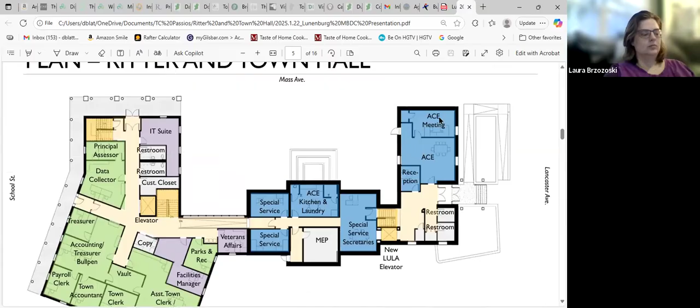I think either could work as long as the proximity was close. My ideal would be to do a complete renovation of Turkey Hill and keep us here. But there are facility limitations -- there's only one adult bathroom in the building. That becomes a limitation for us being located here.

So that would be my dream. But we could also have our own space that was close. The Ritter plan was great, but the town clearly, from what I understand, did not choose that option because of the size of the ACE program.

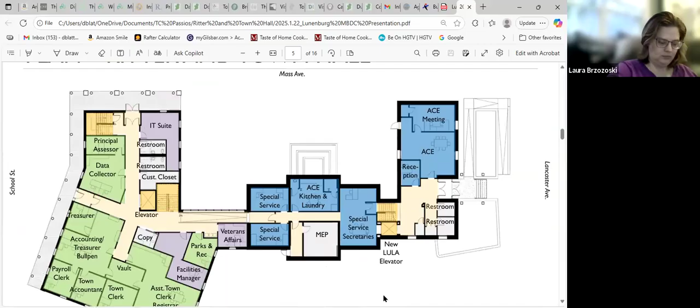Yeah, and I just thought, to help those folks for whom it wasn't fresh in their mind, this was the plan that we had proposed, that you can see on your screen. This would be the upper level -- what you see today would be where HR finance would have been, where the building inspector is, superintendent is, where the building inspector, admin would be, director of teaching and food facilities would be, conservation and board of health, if you're familiar with Ritter today.

And then the other level, the lower level, which is right now the planning department and planning meeting room, would be for ACE. And then there would be the ACE kitchen downstairs. And what's right now the veteran services and the facilities director's office would be other special services rooms. So as you can see, for the footprint, a substantial amount of space was dedicated to the ACE program out of all the room dedicated to the school.

Understood. And that's why the biggest dilemma we have is whether ACE stays on the administration side, or whether ACE was a separate entity, because some folks talked about whether it was appropriate to have ACE in the town hall, as if we looked at it as town hall, town business type of thing. Yes. Okay, all right, excellent.

Jody, and maybe anybody else with knowledge on this, just dovetailing on your preference or best case scenario comment where we'd renovate Turkey Hill, full renovation, and have the offices in there.

Pardon my ignorance, I should probably know this, but do we have enough room in that building today? If we were given a grant and money wasn't an object and we could renovate, do we have the space for central office and what we need it for programmatically for the students?

I believe that we do. We were able to find an art space, which was one of the concerns with our move over here. So we have a dedicated art room, a dedicated music room, and a dedicated STEM room. We have the library. We have just enough room for the number of kids we have today. So if we have a lot of expansion or move-ins, we definitely need more plumbing and facilities.

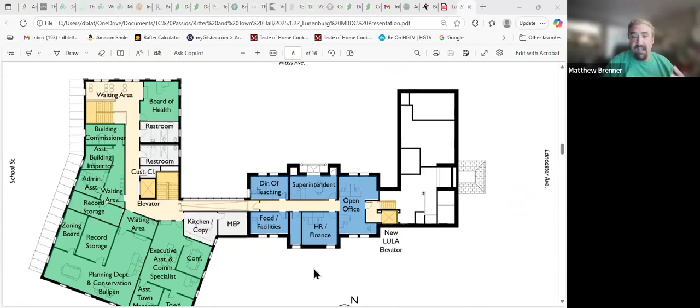I 100% hear the desire to redo Turkey Hill and keep central offices there. I get that, and understand why that would be our first choice going forward. But I want to make sure I understand all of our options. Jody, I thought I heard you speak positively of the previous design that went before voters in May and was turned down—correct me if I'm wrong. When I looked at those plans, all of the needs for central office and the ACE program are met in the current footprint of Ritter as it exists now. I would never encourage Ritter remaining as is without substantial renovation, because that building needs it desperately. But do I understand that correctly? And if so, would it also be acceptable to consider moving central offices to Ritter, or is that a non-starter for you?

It's not a non-starter. It wouldn't be my preference, but it's not a non-starter. Oh, thank you. I used to be a teacher—I get why you want to be with the schools, and I think that's likely the much better choice for us. I just saw that lineup so sweetly, and I wanted to make sure I have this in my back pocket too. Thank you.

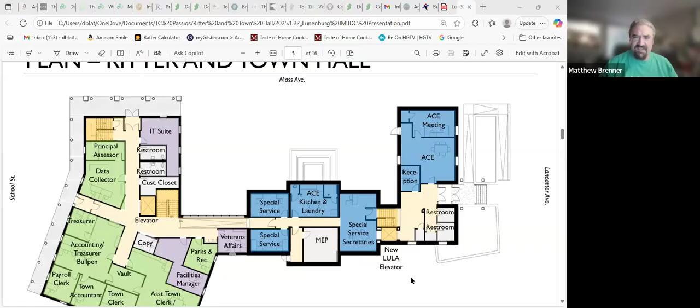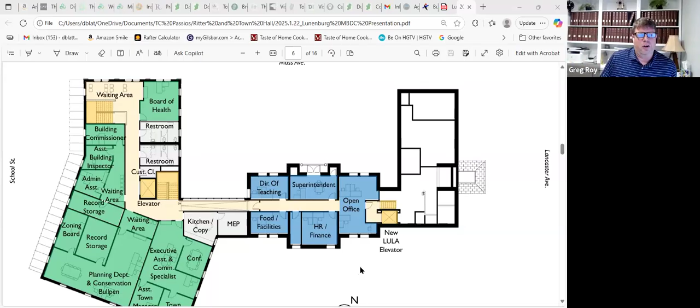Where we're on this screen showing the superintendent's office - I get that's a merging of a couple different spaces we have cordoned off today in the Ritter building, but that's a pretty narrow spot. My point is, I think we were intending on doing a major renovation here, but I'm not certain the space is really going to work as well as it could in a place like Turkey Hill, assuming you're going to have a comparable renovation. I haven't seen the exact space they're using, but I'm guessing it's more along the lines of a classroom type space, so you have bigger spaces that can be renovated perhaps a little more easily. But it's just me.

Greg, I do want to clarify, for everyone - that isn't the position I expect to advocate going forward, but I get it, Matt. Yeah, sorry, I wasn't trying to pigeonhole you. No worries.

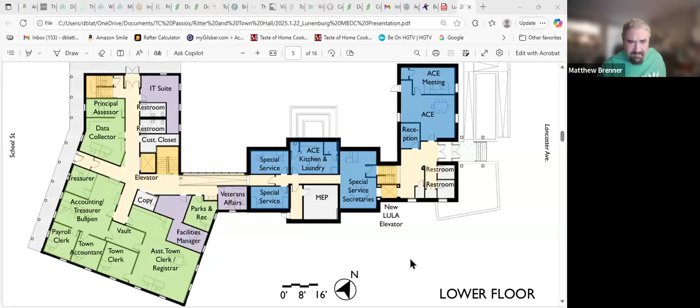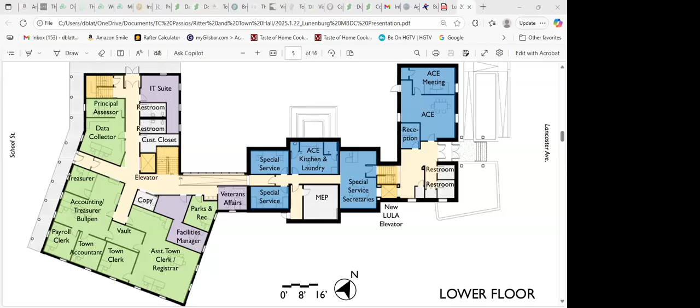So I just have a question. I know we're all pretty excited about the fact that we can separate the two, the school and the town - sorry, Jody, it feels weird saying that. Jody said she wanted to talk to her offices and make sure they were okay with that. So I want to make sure we don't skip that point and that we have somewhat of a timeframe of when she'd come back to us, being like yeah we want to stay, or no, please keep us in the plans. And I know Dave wants to move on from this topic, but just really quickly...

I think it's also important to note that we're going to pay for this, unless I'm missing a program here, 100% out of pocket. So I hope there shouldn't be any notion that if we put this renovation of the central offices and combine it with a larger school MSBA-type project, MSBA will pull that work out and not match us for it. Almost certainly we are not going to cost share on any of this work. So it may make sense to put it there logistically, cost-wise, but we're probably not likely to participate in any sort of MSBA, or whatever they call it now, state sharing in a school project.

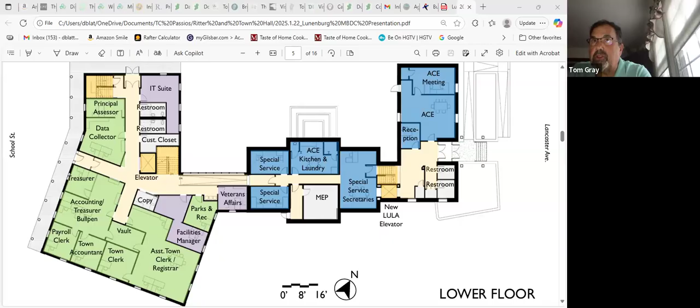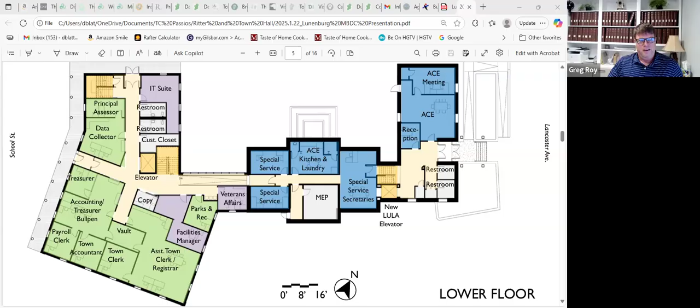Would that be for the ACE program or for central offices, or just? I'm not certain about ACE, but for example, when I was on the committee for the Lunenburg Middle High School project, there were so many things they did not participate in - the most obvious is the greenhouse program. It's a direct school program, the state didn't fund it at all. We paid 100% cost for the greenhouse, and I would imagine central offices would be similar because it's not a direct program to the actual programmed use of the school. I could be wrong, but that was my experience in the middle high school project. But we would have paid 100% if we would have had them in Ritter too.

Absolutely, I'm not saying it's going to be more expensive, I'm just saying we shouldn't think there's any opportunity for less - perhaps there is, but I would imagine the state's going to carve that out. Town participation is the same either way. Not doing central offices in this project does not necessarily save us money, it just makes - there's still that problem to be solved. So that's just important to keep in mind, because I feel like, oh, now we can get a new town hall built for cheaper if we can get rid of this square footage, but the need is still going to be there and the town is still going to have to foot the bill. It'll just be easier for this piece of it, which - I don't know, maybe this town has a history of preferring projects in little pieces instead of a more cohesive plan. I'm thinking of 2004, the library and public safety and the primary school.

Agree. All right, just so we're all on the same page here - the prior superintendent, my recollection, was that she wanted to keep her offices out of the schools, and that's why. And then ACE had to follow, as we just talked about.

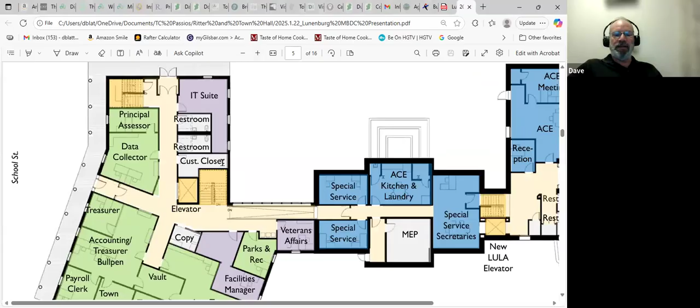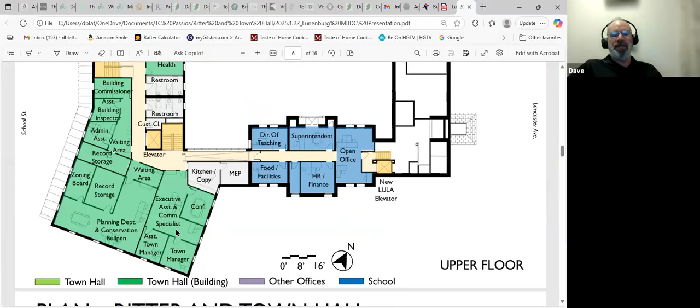This section on your left, my left as well, was the town hall offices. We had basically everything on the first floor. On the second floor, upper floor, was going to be town manager, planning department, conservation, building inspector, things of that sort. So the first floor was going to be more like accounting, town clerk, and things of that sort.

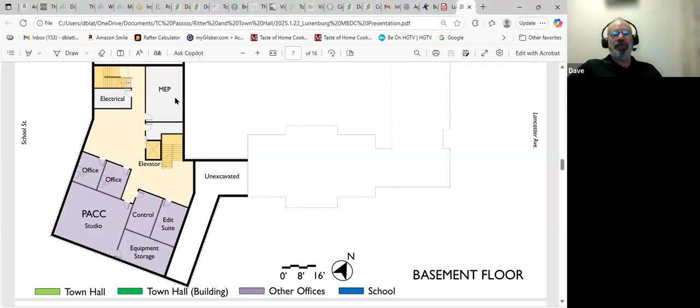I don't necessarily agree with all this, the way it might be set up, but I'm not going to ask that right now. The second floor was more for folks who want to go get a permit or other things, they would be going up to the second floor. And then the lower level created a space for PACC and a mechanical, MEP, I assume is mechanical room, for lack of a better term.

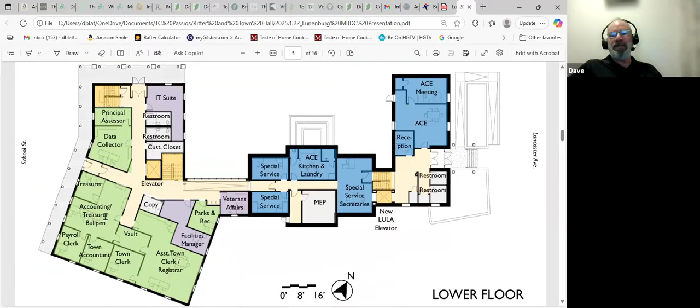So, obviously the footprint is quite different from what we want to do, or what we can do. I believe that this rendition of space was done based on what the department said as wants, I should say, versus what we might see as our needs for this renovation.

Can I ask a question of the people who've been on the committee? And I want to phrase it delicately, because don't phrase it delicately, we're all big boys here and girls. Why is having town hall all in one building a need and not a want? I understand the reasons why, and I agree they make sense, but what was it that pushed, what were the considerations that pushed one conjoined town hall from a want to a need?

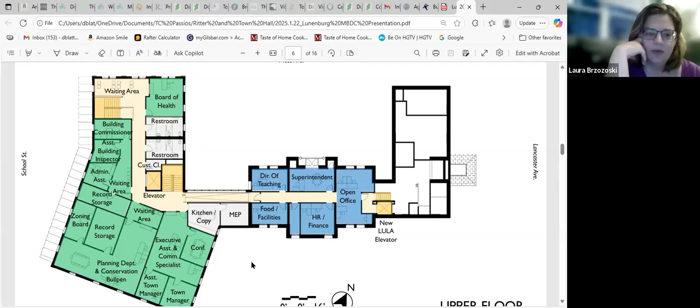So I'll throw it in at first. Greg, I'll let you join in as obvious. I get to be chair now, so I get to do this first. I can act like Mr. Jeffries. The fact of the matter is, I look at it as the interaction of the town. The town manager had two facilities they were having to go work through, or just a simple thing of if you wanted to go get a permit, or something to do with having to pay, you had to go to one building, get your paperwork, go to the other building, pay your money, go back to the first building to get your certificate or something like that. But it more had to do with it's a town, and that the town administration should be a unit that works together more than anything else. And especially now when we're looking at filling vacancies and things like that, how much of the electronics age, what is the dynamic of the town hall going to look like as we move forward, type of thing. Greg, how'd I do?

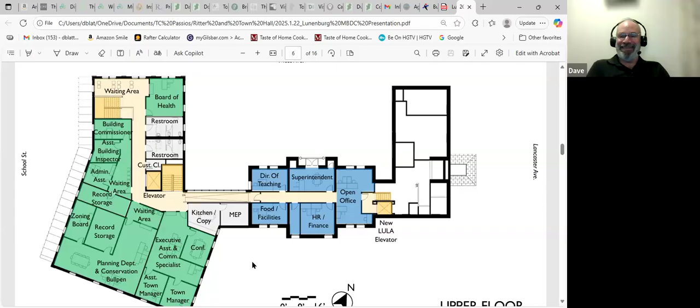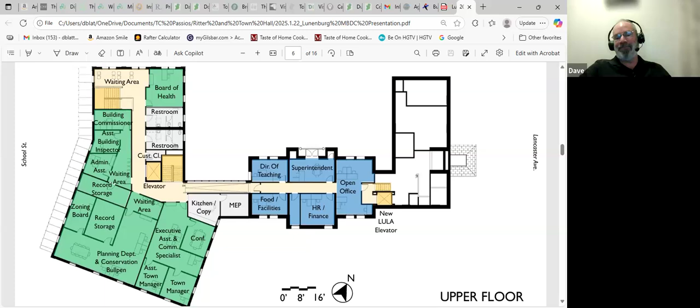Good, I have two things to say now that you've commented. My response to Laura's question was not necessarily to answer it, maybe to be a little bit more political. But this I think is in the spirit of what I said earlier. The reason why we were looking to consolidate town offices into one roof is because that was what the article said in 2019, when they funded the first study of this committee, and the select board chartered us.

Fast forward down the line now for 5 years, and we have definitely just carried that mission forward, perhaps without giving it enough follow-up scrutiny. I mean, one of the things that's happened in the last 5 years is, and I can tell you this from experience as a person in town who files land use applications, it is all done 100% online. You don't have to walk around anymore, you don't have to file plans, you don't have to even go get a certified abutters list from the assessor's office if you don't want to. They'll do it automatically for you through the OpenGov system.

So things are changing. I'm not saying that the consolidated office isn't a need, still it might be, but I think we talked about this a couple weeks ago. And I get that we don't have the town manager with us tonight, and that's fine, but we need to engage the town manager on this point. Yeah.

We need to understand what she thinks about this issue, because things in town are changing. Personnel has changed significantly over the 5 or 6 years since we started this process. The way we do business in town is changing. This discussion about questions and what we're going to ask departments, I really think we got to be careful to make sure we do it with the town manager, at least. I think she needs to have input on this.

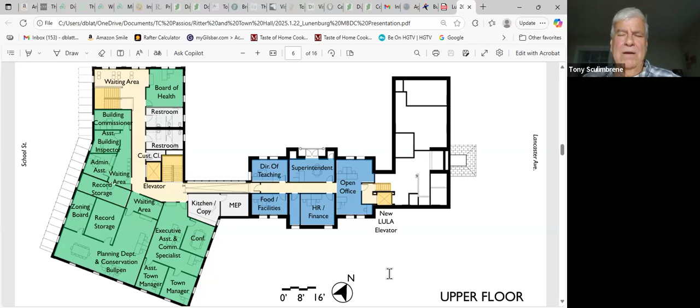I'm not saying we shouldn't talk about it, I'm just saying she might want to have some oversight. It's really important for us to talk about whether what pieces we need to be co-located, because you're absolutely correct. OpenGov started out being used by the building permit process, that was its first use, but now it covers everything.

And they're trying to expand it even more. Conservation, and you can pay for stuff, you don't have to go to the town clerk's office. It has really, and it's not going to get anything but more robust.

I think it's a sea change, and this is one of the things I've talked about as being part of the master plan process, is that the way town government functions is going to be much different 10 years from now because of AI. The Board of Assessors, assessor information, GIS stuff, paying your taxes, trying to deal with a tax bill you think is too high - it's all going to be done differently than it has for the last 50 years. It's going to change, it's going to be like night and day different in the next couple of years.

And I think it's absolutely something the town manager needs to get involved with. I think it's really crucial. I think we need less square footage for public town functions than we ever imagined. But we need to have a conversation with the town manager about that to make the transition.

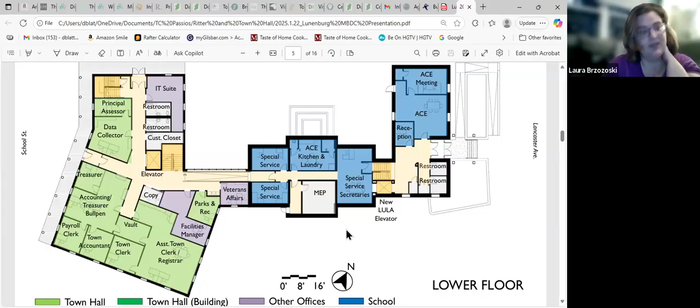But like Tony said, I think a lot of things have changed because this original committee started pre-COVID and pre-Zoom town meetings. That's exactly right, no kidding, I was just going to say that.

The whole COVID thing has changed the whole game too. When I want to meet with the building commissioner in Fitchburg, I don't go down there. I email him and say, can I set up a quick video conference with you? And he just pings me on a video meet. It's great, it's just as good as going in, it's better - I don't have to waste half an hour round trip, it's more productive.

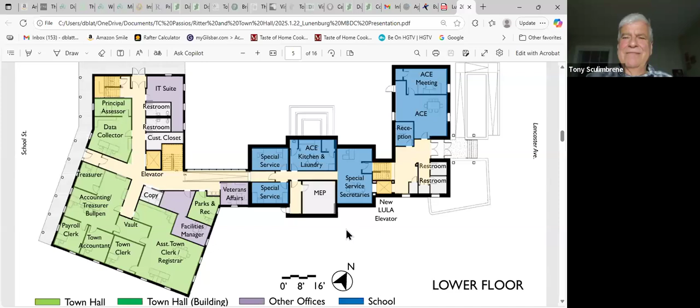Not to be disrespectful to anybody, but as we get the younger generations into these positions, I think you're going to see the move towards that advancing.

No one younger than me wants to... well, that's not true, that's a stereotype, but by and large, kids don't want to interact with people, right? They want to interact with machines. I'm not saying that's good, I'm just saying that's the trend in society. So I just think a lot of things have changed and are changing. It's not that we don't want to talk to people, we just want it more efficient, that's the difference. Well, I'm more talking about, like, my kids.

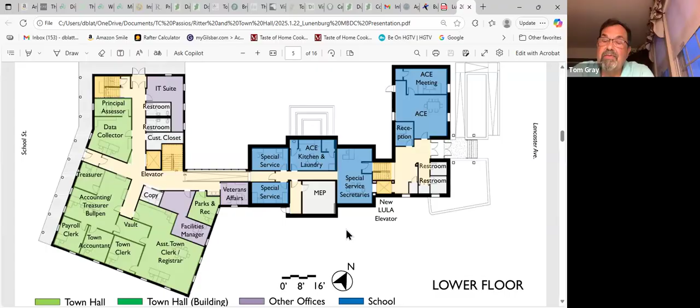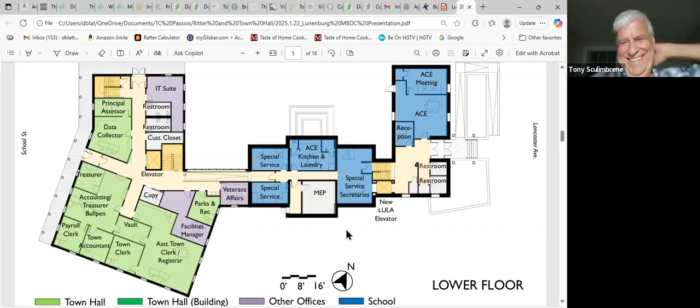They just... well, I'll go one step further. We've talked about this, but the idea of folks drifting into town hall to chat with people takes away their ability to actually do their job. Can you be impolite and say to a 40-year, 50-year resident of Lunenburg, 'Listen, I can't talk to you,' and tell them to go away? No, you can't do that. But that's the other side of things too, and that's one of the ideas we discussed.

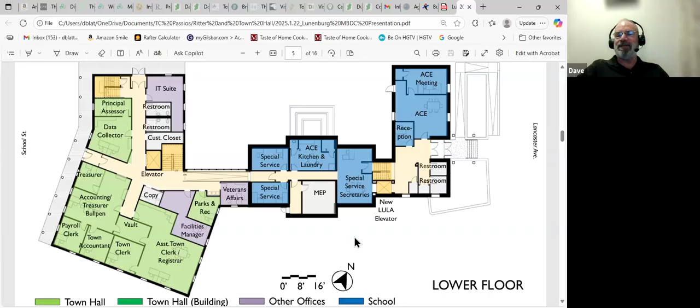Anyway, I'm not going to get into that. We don't have a lot of time today. I'm the guy with the hard stop at 7, so before I go into public comment, next meeting, are you guys okay with two weeks from today? Same time, same bat channel.

Is that Columbus Day? Oh, that's Columbus Day. No, I'm sorry, it's Indigenous People's Day. Are we allowed to say Columbus Day anymore? Well, my calendar says Columbus Day / Indigenous Peoples Day / Thanksgiving Day in Canada. Maybe Thanksgiving Day in Canada makes sense because there wasn't going to be a harvest in the middle of November. So the 13th is kind of out, school's closed, and then we run into difficulties with other things.

If you mean planning, planning is twice a month, not every other week. So the 13th would have been a planning board meeting anyway, because it's the second and fourth Mondays, not every two weeks.

Okay, so, wanna do a quick one looking at something like the 20th? Personally that's great for me, but I'm one member of the committee. Does the 20th work for everyone? Works for me too. So far so good. Let's go the opposite question: is the 20th bad for anybody? Excellent, okay, so I'll set the next meeting up for October 20th.

The only way it'll change is if our town manager can't make it on the 20th. I think that's going to be the key, so I'm going to check with the town manager and facilities director to make sure both of them could be available for that date.

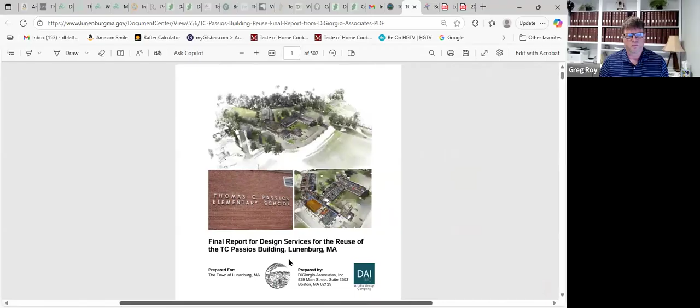That is probably a multi-hundred-page document, 400, 500, 600 pages or something. In there you'll find the matrices, I think, of how you'll find everything. When is this one from? Oh, it says right there - 21. Okay, so we hired him a couple months before COVID hit, and we finished it later that year. In fact, some of the smaller documents I sent you on space needs was taken from this study moving forward.

So, space needs analysis right there. I would be cautious about using this stuff - I looked at the Brooks House and they had the wrong square footage. When I opened up, I think it was the Vertex study, they had the Brooks House at 10,000 square feet. Brooks House is not 10,000 square feet.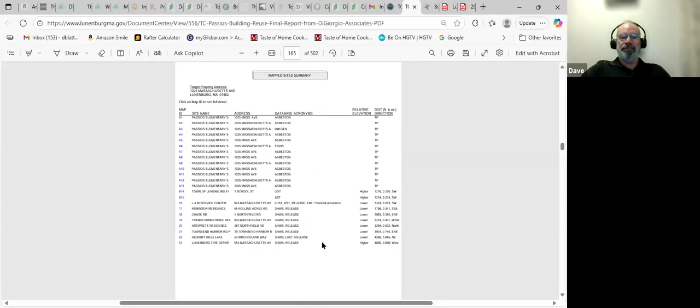No, but at least it's a starting point, though. If nothing else, it gives us an outline of what we need to fill in. But it reflects a time of business that we're clearly moving away from. That's true, but at least it's helpful in informing everybody. And like I said, I shouldn't be going through this whole thing, so let me get rid of that and go back, but it's there, so I'm okay with that.